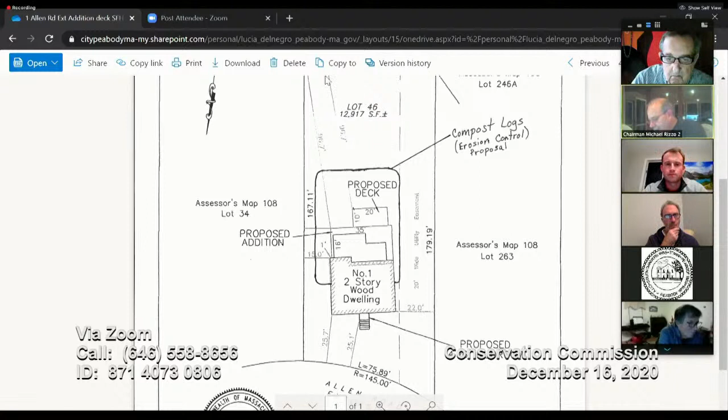Okay. And then as you're excavating, you're going to take out most of the spoil at that time and not stockpile. That's correct. That's correct. You need enough for backfilling. That's correct, yep.

Okay, so Lucia, you want to speak on this? Yep, I'm gonna stop, hold on. It's hard when I have to share the screen. I forgot to record. All right.

So really, my notes just say, because as you already said, it's a super simple project. So whatever kind of erosion controls you guys want, we don't allow hay bales. I already expressed that to them.

Yep, I can send them some links. I don't know if you guys have any links of companies that do a good job with the compost logs or the straw wattles that don't have the mesh on them.

One of my recommended conditions would be, where do you guys want stockpiling? That's something -- are we going to need to stockpile? Well, I think we kind of discussed that a little bit. Would hope that it only be stockpiling enough to do the backfilling.

Are you putting in a full basement? Yeah, there'll be a full basement. Okay, so there's quite a bit coming out. So usually the contractor knows how much to leave so that he can backfill. Right, and if you could do that, then I would think that probably towards the rear would be the spot you'd have that stored. Right.

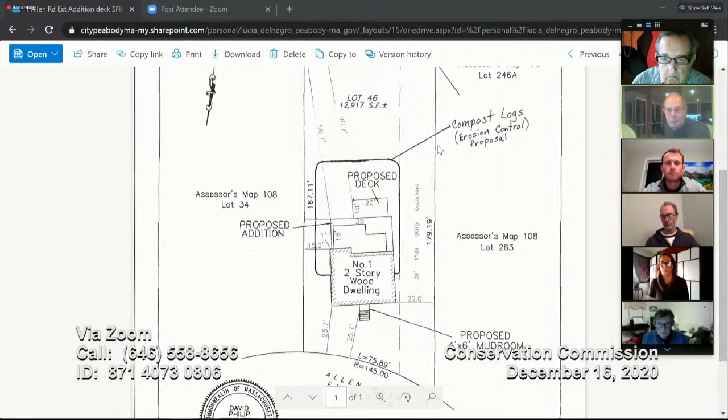Even though, let me find the wetlands. So the wetlands are, this is the wetlands right here. Yeah, remember this area, Bay State Boulevard? Oh yeah.

So I guess my conditions would be, if you guys were going to, after you open it to the public -- I think I do see some members of the public there. There's a lot of people in the meeting room right now.

But it would be, the erosion controls must be inspected and approved by city staff before work can commence. Typically 48 hours before the start date, I would get an email.

If you guys wanted to add a stockpiling condition, I would highly suggest that you do, if they are going to stockpile on the property, that erosion controls are around it and then it's covered with a weighted tarp at night.

And then just the other, I guess my same one is the owner should notify the commission in writing once work is completed. So 3 super easy conditions: erosion controls, stockpiling, and notice.

Okay, great. Those sound fine to me. I think we talked a little bit about the stockpiling already, right? Yep. And how about the rest of your commissioners? You guys have anything else you want to add, or have any comments or questions about this? It's like a pretty straightforward project.

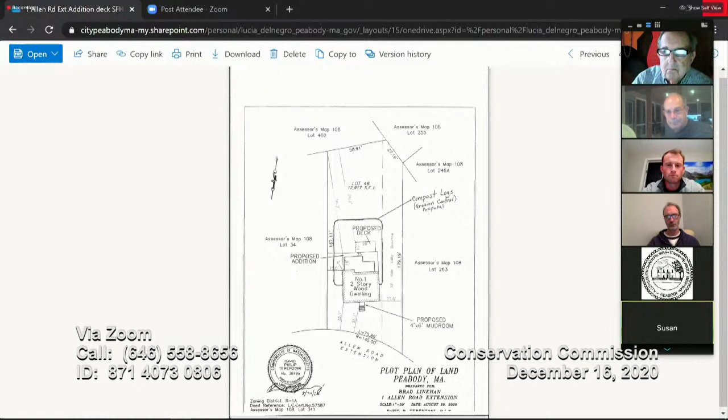Correct. Yep, okay. So what I was saying, thinking if there's an actual building there, maybe the drainage would be different. So where the house is now there's like the wall. It's a little bit different in the front than in the back, right up - I guess I'm not explaining it clearly. So if you put in a basement and everything farther into the back, that would change the drainage.

Just the fact that you're taking all the grass and dirt up. So against that line where the compost logs are, it dips down from there, down to those two fences, and it's probably 8 feet, isn't it, or something like that, that it would drop down? Yeah, I think just looking at the plot plan here, Sue, it looks like it's about 20 feet or so. I mean, grade wise, the difference in elevation, I don't think it's 20.

The difference in elevation from where the BMPs will be placed and where the property line is on the right side of your house - what might be that grade difference? Yeah, I'm not positive either, but I would say it's probably 8 or 10 feet. Yeah, that's probably right.

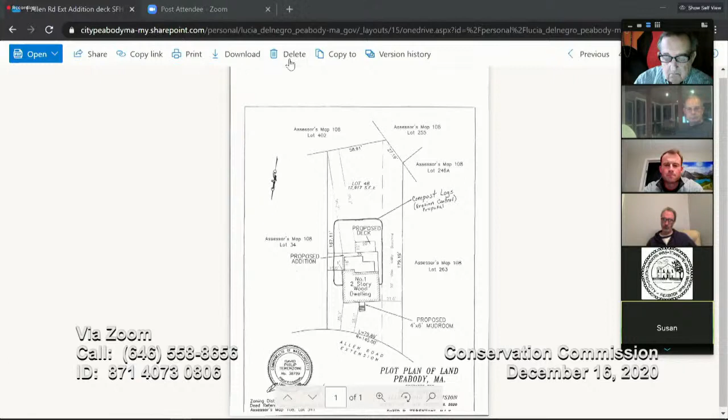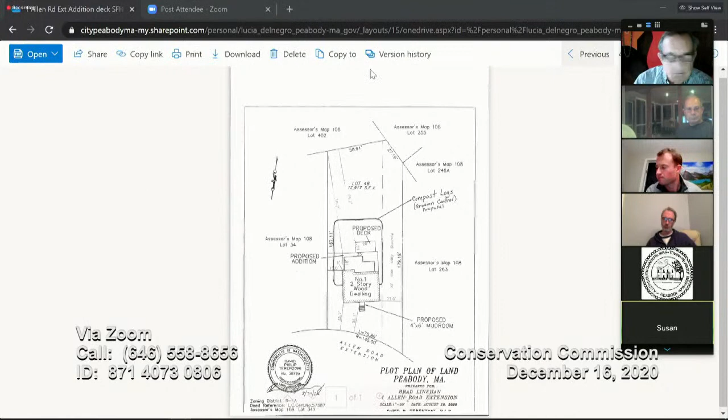Because I think that's probably Susan's issue, and she's right, water will be displaced. Yeah, they're higher than I am, so I'm lower. If I might get more, and actually the back part of my yard, which according to the assessor's map is even lower than the other part.

I hadn't thought of the water running through what I'm calling the dead zone. But it is a bit of a hill. I mean, it might not make any difference. Yeah, it's not like we've really had an issue with flooding in the past, Sue, so I'm not sure this would really cause much of a change.

You haven't, I have. I have a sump pump, so I have had an issue. I don't know if it would make a difference in the back there on the water. Before they built Allen Road Extension, there used to be a little gully between us that would fill up with water and take care of it. But when they moved all the dirt, that's no longer there.

I'm just not looking at it—if all that area is displaced, which now absorbs water, I don't know whether it would make a difference on that hill. You don't want the whole hill running down either, eroding.

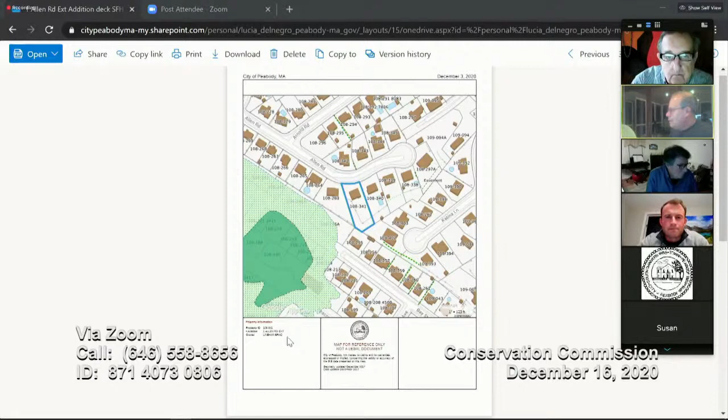If I could ask a question about the addition, there's a couple shapes—it says proposed addition and shows 16 by 35, then there's another shape inside the square. What's the difference between these two? Yeah, Mike, the shape within the square is actually our existing deck. So the addition would be replacing approximately the area of where the existing deck is.

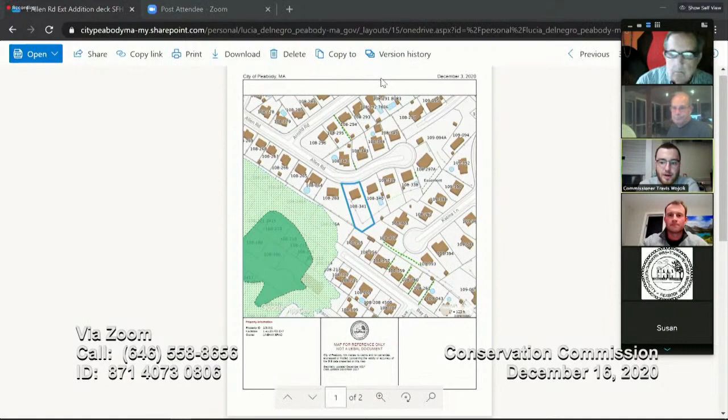Brad, I've got a question through the chair. Is this entire project within the 100-foot buffer? I'm not sure if the entire project is. I think it goes about halfway into where the project would be, something around 60 or 65 feet or so.

So is this property non-jurisdictional or jurisdictional? No, the entire project is in the buffer zone—he's saying it's 60 feet away, so it's the last 40 feet of our 100-foot wetland buffer.

Okay, well, any other commissioners have any comments on this? I don't think this is going to have any effect on anybody, I don't think it will affect the abutters at all. They're not doing anything that's going to affect any of the grades. When he's done, that's it.

I understand there's going to be a roof and some runoff, but it's just going to run off to the adjacent ground—it's all in his yard. Yeah, I think you're right.

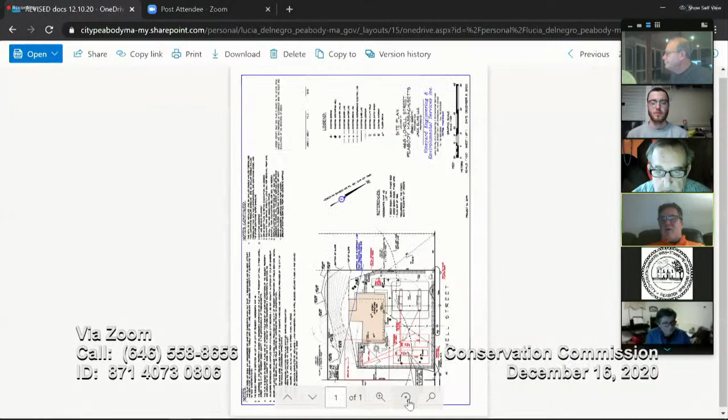We revised our plan - not sure if Lucia can put that up - but we've increased the number of erosion controls. I extended it at the request of the commission, and we showed the location of the proposed fractionation tank. Again, we don't anticipate any groundwater management requirements, but we do have a provision to deal with groundwater, and we will be working in close contact with the LSP of record for the site, which is Sovereign Environmental. You can see on the drawing, the frac tank staging area is to the right of the building as you're looking at it from Lowell Street.

And you can also see on this drawing, there are several monitoring wells around. As part of our letter, we identified the data tables from the Sovereign report, the most recent one submitted to the DEP in January.

We took that table out and included it with our submittal so you could see the depths of the groundwater. Tanks are going to be about 8 feet diameter, 2.5 to 3 feet below grade. They're not going to be pouring any concrete in the ground, so there's no reason to dewater. What they may end up doing is over excavating and then putting the stone bedding, so they could be excavating in the water.

Most likely they won't be dewatering to do that. But what they would do is put stone bedding in, and then put dead men on each side of the tanks, a long way, parallel with the tanks. They would pour the concrete to create those dead men at the ground surface and then lower them in, and strap the tanks down. Generally, if they had to dewater, they'd put it into the fractionation tank, and once the tanks got into the ground, they would use that fractionation tank water in the tanks and just leave them there as ballast until they got them covered with stone.

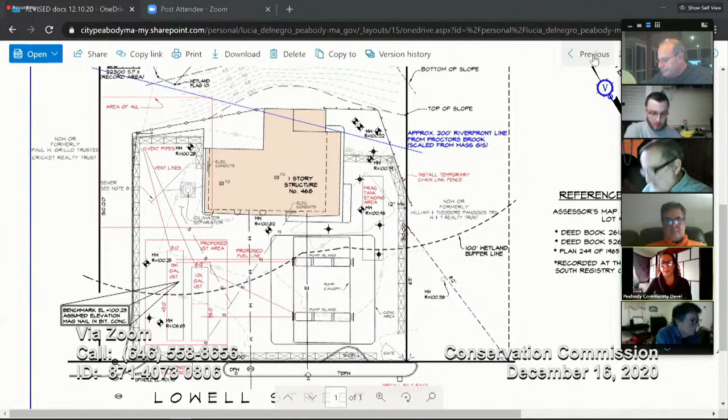Has DPS looked at this project at all? Have they commented in any way, Lucia? I believe Bill Stansfield got a copy of it. It doesn't look like he responded, hold on, because these are just revised. Yep, here's the DPS memo. Yeah, that's the same one from last time. Yeah, he's not gonna respond. You guys brought up more comments than he did.

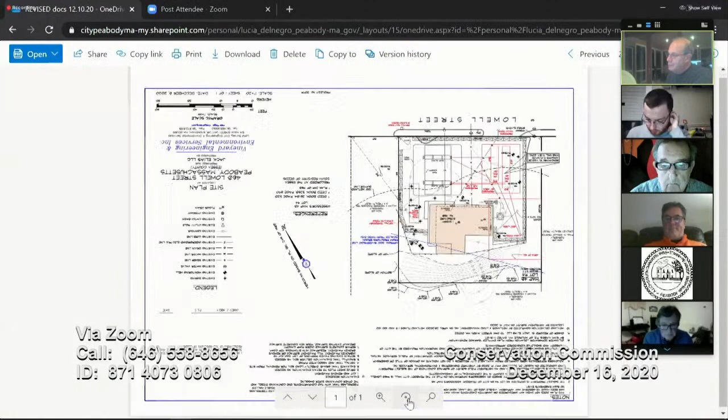All right, well, I think the method of installing the tanks and the excavation associated with holding up the sides - these are deep holes. Like you said, the tanks are 8 feet in diameter, and they're about 30 inches down, so you're looking at 10, 11 feet of excavation, in rather close proximity to the road. So for safety reasons and OSHA standards, you need to cut that slope back at least 2-to-1 or 1-to-1, which is going to take you into this town layout.

Right. So I would assume that you might be putting some sheet piling in or some kind of shoring to hold these holes up. Yeah, that's probably likely. And the sheet piling will also control groundwater. Right. So they're not showing the plans, and it's not on the drawing, and there's no detail for it. I thought I saw something about shoring somewhere. Oh, drive sheet piling, yep. It's a note on your plan. I thought I saw that.

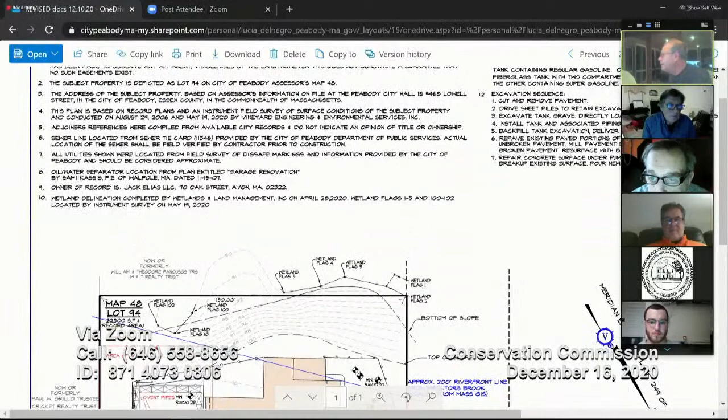We probably, it hasn't been designed yet. It has to be designed by a structural engineer. And if they get approval, we can submit those structural engineering plans or the plans for the sheet piling as a condition. Okay. But this is a standard practice for the tank installation. A lot of times they're close to the property lines. In this case, it's pretty close to the roadway. We're trying to pull it away from the wetland.

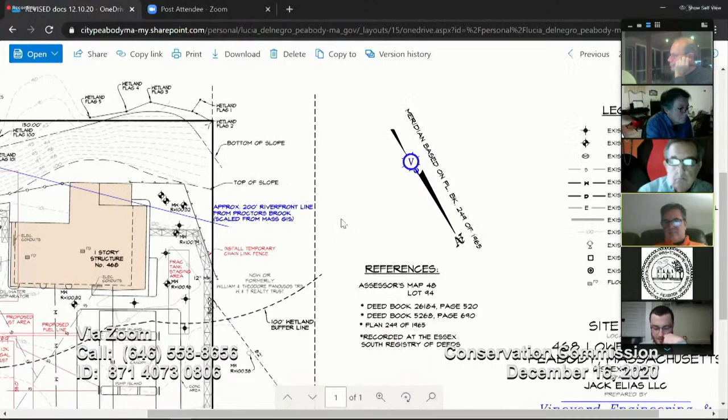Is this going to be self-serve? I think I asked that last time. Eddie's online - Eddie, is this going to be self-serve? Yeah, that's what you guys said.

I'm not quite sure what the answer was the last time. I don't think it's gotten to the point where they've made that determination.

So the canopy and the islands, are they going to stay? You're not doing any island replacement? I believe the existing islands are going to be reused. Initially they were just going to trench over to them, and they're probably going to replace the pumps themselves. I don't know if there's any pumps even actually out there right now. They would normally put in new pumps, new lines, up to today's standards, but the island itself was going to remain. As far as I know, the island is going to remain.

Through the chair, one of the questions I have is, are they going to remain open during this? I don't know how they can, but are they intending to remain open? They won't be able to. I think the answer was last time that they were going to have to close. There's going to be quite a bit of construction equipment in the area. The hay bales are going to be encircling the whole entire site, and the construction fence is going to go outside the hay bales. So it's not likely that they're going to be able to stay open even if they wanted to, since they wouldn't have access to their garage openings. And obviously there's no gas there now.

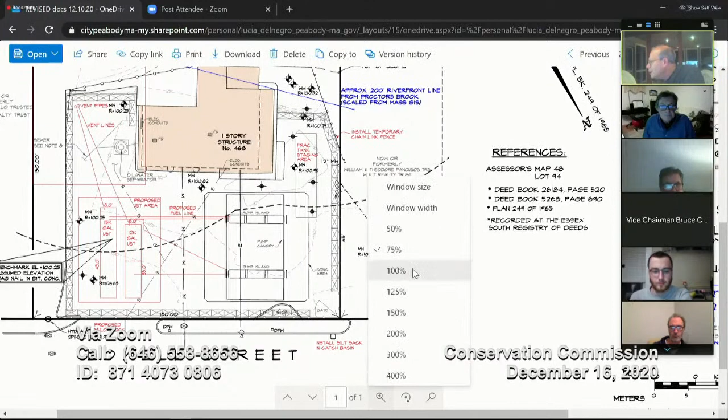Now will the site be fenced off? Yes. Is it on the drawing? Is there showing construction fencing? Maybe it is, I see something. Yeah, you got a fence with a gate? Mhm, okay, I see it. All right.

So the concrete slab would be the same size? It is, exactly the same size as before. So maybe we can get a copy of the fire suppression plan. Has that been filed with the state fire marshal yet? I don't think it's been designed yet because we're hoping to get through the Conservation Commission first. Once we're finished with the Conservation Commission, we have to go to the city for construction. Well, maybe we can get a copy of that when it's prepared, 'cause that'll show all the information about the concrete pad and the dimensions and all that stuff.

And what about the pavement? So we don't know the limits of your milling and overlaying. You can't tell by the plan how much of the existing pavement is gonna be removed and replaced, or where the milling and overlaying limits are. We're not intending to do any more paving than is already out there right now, it's gonna be the exact same. The site is largely paved; the only areas not paved are behind the station and on the edge of the property sloping down toward the wetland. We wouldn't extend the paving any further than it already exists.

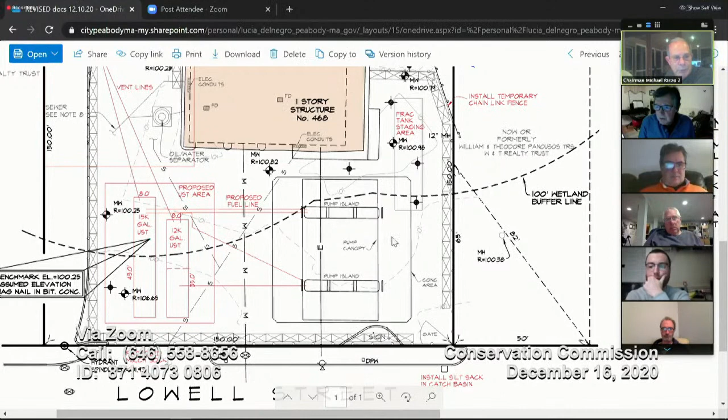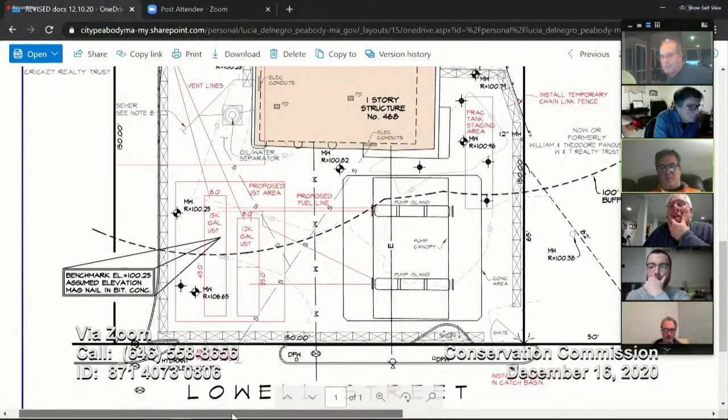We're not opposed to using straw wattles or mulch sock, whichever. I think that was preferable to the commission. You prefer one from the other, Lucia? Straw wattles? The first plan did show hay bales, and I think that's where it was probably looking at an older plan.

My preference is anything that doesn't have plastic meshing. It has to be either biodegradable from the sun, or the compost logs that you just cut open and leave there. Well, no, Lucia, they're all gonna be coming out. That whole site's paved, so once construction's done, those will just be taken up. They can't be left there to go back into the soil. There is no soil, it's all paved.

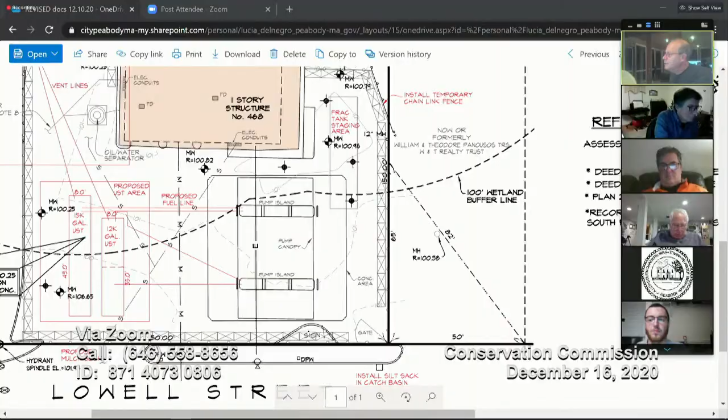I know, but even if they use the plastic ones on site, the plastic's gonna go in a landfill somewhere. Oh, so I'm just thinking of post-construction. Okay. So that could be a condition. Anybody else?

If nobody has any other questions, Lucia, if you want to open it up to the general public who want to speak either for or against the project. Yes, if anyone in the audience would like to speak, please raise your hand. So far, I can tell you, I don't think anyone in the audience is gonna want to speak. It looks like everyone in the audience is for, as I said, 83 Pine or 0 Willowdale.

Okay, if you wanted me to read off my recommended conditions again, I can do that whenever you want. Or if you guys already have conditions you're thinking of, I don't even need to. I think we kind of talked about it last time, and now we got an updated plan. I would like to see some of the proposed work relative to the pavement and the concrete pad shown on the drawing, so we could condition that the plan be updated to reflect that.

I do, actually, sorry to interrupt, Councilor Charest has his hand up and he would like to speak. Okay, sure, can you hear me? Yes, yes. Again, this is not my ward. Thank you for allowing me to speak. This is not my ward, but my ward is across the street.

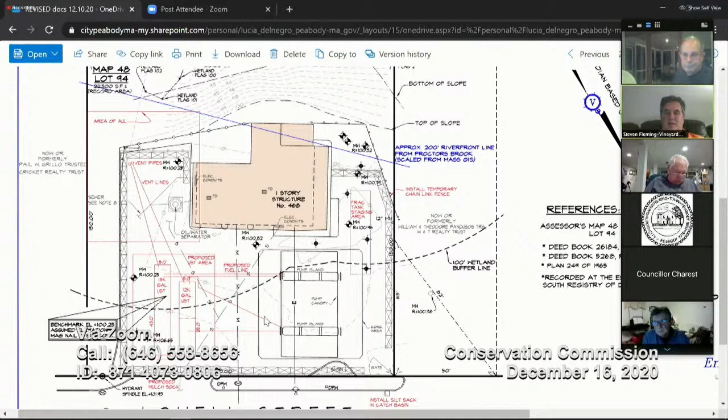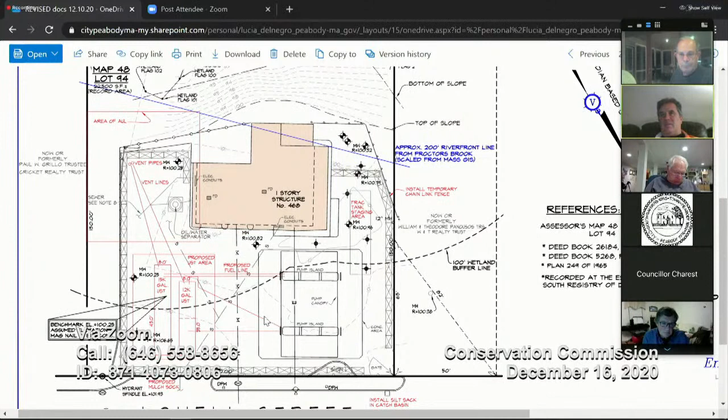Sure. We prepared a soil management plan. The site is currently an existing open hazardous waste, state-listed hazardous waste site. Removing any impacted soils from the site only improves site conditions and reduces overall contaminant mass. We expect that the upper soils will be non-impacted because the area had been excavated before, but we expect that the lower soils, in the low portion of the excavation closer to the water table, may be impacted by gasoline constituents from historical conditions. Removal of any kind of contaminant mass can only improve overall site conditions.

The material will likely be removed, recycled, and turned into asphalt batch material and reused as pavement. It's a great solution for a problem. The area will be replaced with clean backfill, and then the tanks will be installed so that the service station can operate at its highest capacity.

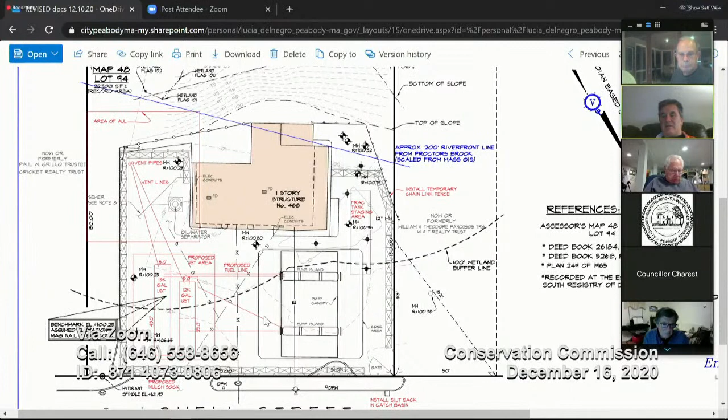The tanks that are going to be installed have all kinds of protections and a lot of leak detection systems that are pretty sophisticated. The system shuts off every evening, and if there's even a change of pressure, the system can't go back on again. So if there is a loss, even between the two double walls of the tank, say the interstitial space detects that there's a loss of pressure, the tank system shuts down. So it's a really sophisticated system going in there, and removal of the contaminant mass should only improve site conditions.

It will have no impact at all on the resource area of the wetlands. Removing that soil can only improve site conditions and reduce contaminant mass. Thank you. Thank you, chair. So you're saying the movement of the soil and pavement, there will be no release into, there's no escape from the removal? There's no chance of that escaping the removal and going into the wetlands?

I'm not quite sure how that would happen.

We're going to take the soils and pre-characterize them ahead of time in accordance with our soil management plan. That means we'll take soil samples using a small drill rig, about the size of a small Bobcat loader, collecting samples from the upper and lower soils and running them for laboratory analysis.

Before we even open the ground, we'll have a location where those soils are loaded from the ground to a truck and driven off site to an appropriate disposal location, whether it be asphalt batch recycling, or for the upper soils, an unlined state-listed landfill for soils from sites like this that aren't impacted above reportable concentrations.

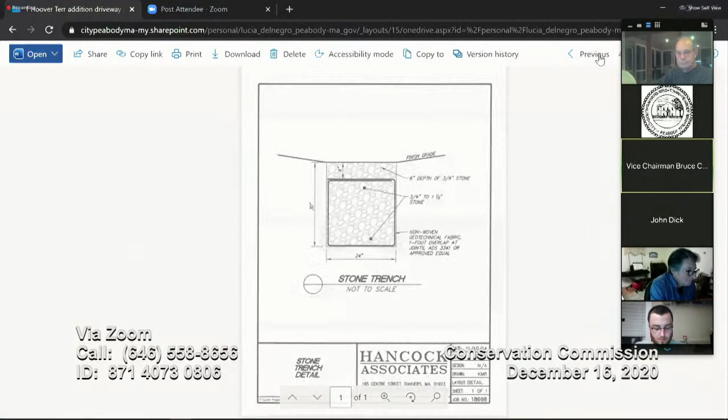Bear with me, I'm trying to find it, I was given so many plans for this. I don't know where this is. You gotta open the file. You gotta open that. Yeah, go to that. That's not the most up-to-date plan though, this isn't even it. Right, you gotta hit open, up here in the left-hand corner, because it keeps going away. You gotta scroll down. Oh, here we go, there you go.

John, it's pulled up. There we go, how's that? Can you hear me? Yeah.

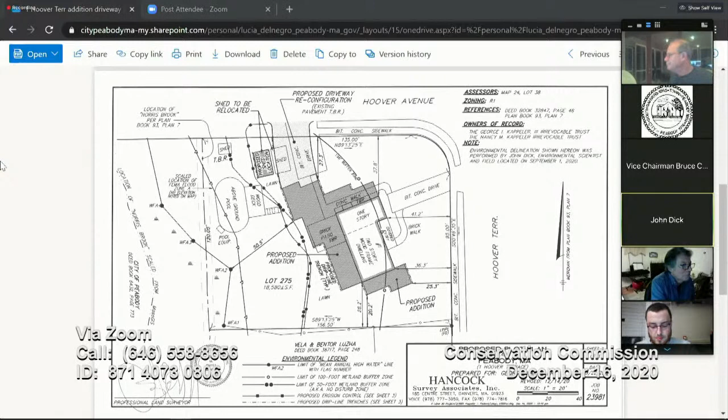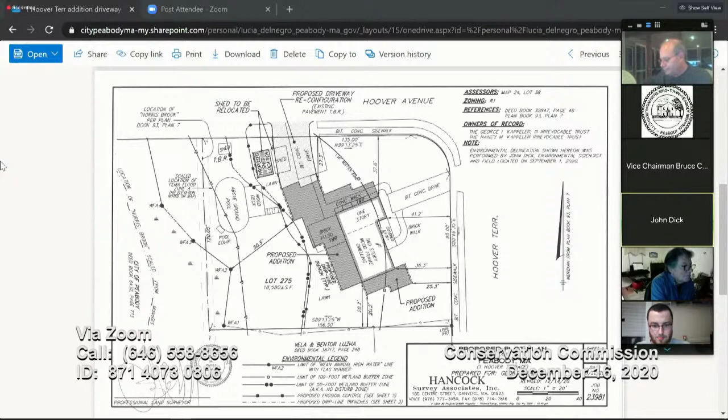This entire site is lawn right up to the edge of the stream, and that's not going to change. But on the other hand, what we propose to do is compensate for all of this additional hardscape by recharging all of the roof drains and the driveway. You can see here on the plan dashed lines and a proposed drip line trench, and on the last page of the plans are details for those trenches.

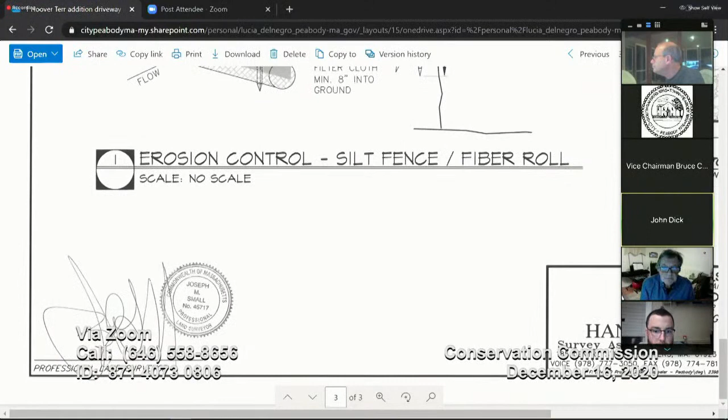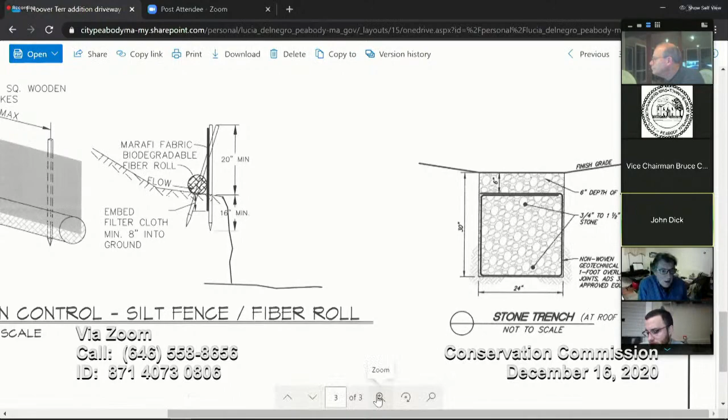I would hasten to point out that we don't yet have a roof layout for the property. We're guessing where these trenches are going to go. Rest assured, the trenches will go underneath the eaves, wherever the eaves wind up being. But it makes no sense to get ahead with the design of the individual floors and rooms in the house until we get a permit to actually build the footprint. So the stone trenches will be underneath the drip lines, wherever they wind up being, and we'd be happy to come back with a revised plan when we have the architectural drawings.

So why would we issue a permit now if you don't have that information yet? The architectural drawings are neither here nor there. The floor layout, all of that, under the wetlands regulations, is not a concern of the Conservation Commission. It's the footprint of the impervious surface that matters. What we don't know now is which way the roofs are going to pitch. It's very likely that they'll pitch exactly where we show them.

You'll note we also put a recharge trench alongside the new driveway, and a recharge trench alongside the shed. So this is actually a net gain for the riverfront. Areas that previously discharged to surface from conventional gutters will now be discharged to a recharge drain built underneath the eaves. This is essentially stormwater management for single family houses.

That's a big house. It is, and as I say, this is largely because they're trying to convert to a one-story house so that they can readily move around without climbing stairs.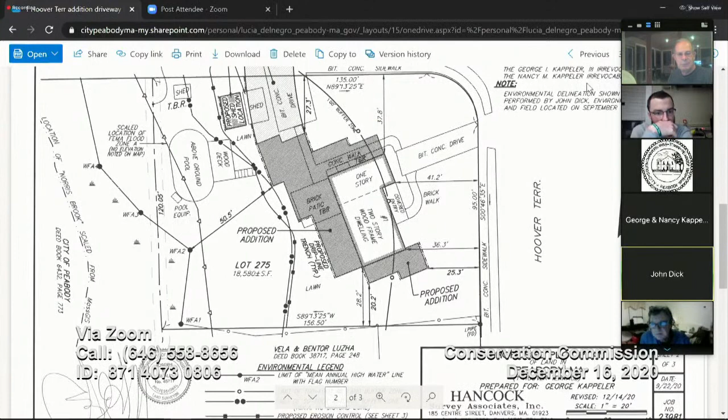What's the status of the pool there? There is an above-ground pool there, yes. So looking at the configuration of your new building, it looks pretty close to the pool. Is that going to stay where it is? George, I'll let you speak to that. As far as I know, it's not moving.

Anybody answering that question? Is George there? I'm sorry, I muted instead of unmuted. Yeah, the pool will stay there. Maybe the configuration of the stairway to the deck will have to move.

I think the site is fairly flat. The site is quite flat, yes. So you're not proposing any grade changes? None.

Is there a silt sock shown on here? The silt sock is shown. It interweaves with a 50-foot buffer because we have to get behind the building to work on the siding, so there's a section in the middle of the property where the silt fence is a little closer than 50 feet to the wetland. That's just to give us room to swing a cat back there. Oh, there is, yeah.

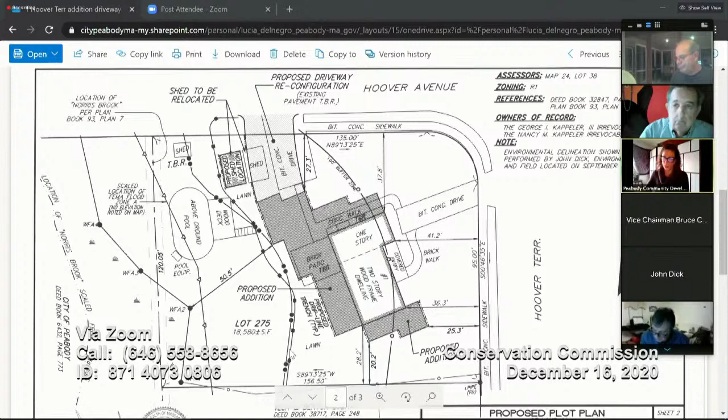And then the last one would be the roof runoff, via surface recharge trenches along the drip line in lieu of discharge via downspouts, as stated and shown on the revised plan and narrative, should remain in perpetuity. So those erosion control, stockpiling, the pool condition, and the roof trenches in perpetuity.

Okay, sounds good. I have a question about the drip edge trenches — if they're in perpetuity, don't they have to be cleaned out periodically? Because they'll fill up with all kinds of debris.

You're exactly right. Usual practice is that every 10 years you take a look at them and see whether they're blocking up or not. It's pretty obvious when they do — you start getting ponding water. Then you just dig the stone out and replace it. And the current homeowner has to do that. Well, the current owner, or whoever owns it when it happens.

Okay, will that be written into something so it's identified? Well, the order's on record forever, and it'll be recorded. And when they come for their certificate of compliance — they're going to need at least a partial certificate before they can get their occupancy permit — when they come and get the certificate of compliance, there's a section we check off that would say conditions in perpetuity. The pool condition would be one, as well as those trenches.

Bingo, thank you. Is there any approved permit for the pool? Does the building inspector have one? I can't answer that question. No idea. This is George Kappeler — no, that pool was there when we moved in. I mean, it's been replaced, but no, there has not been a permit.

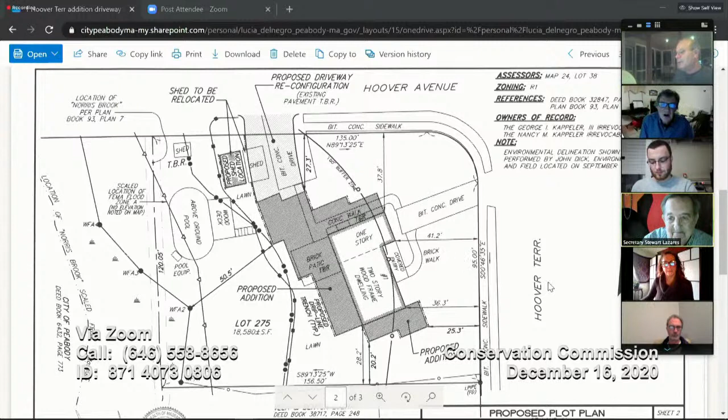All right, and I'm gonna go ahead and do a roll call. A question on the stockpile - the stockpile we determined to be in the front yard, right? Probably on the side, looking at the site plan, I would think that they're in front of the house. Well, there's trees there. I don't know where - wait a minute, go around the corner here. Yeah, it could be the front. Could be the front. Hopefully they'll take out any material that doesn't go back in.

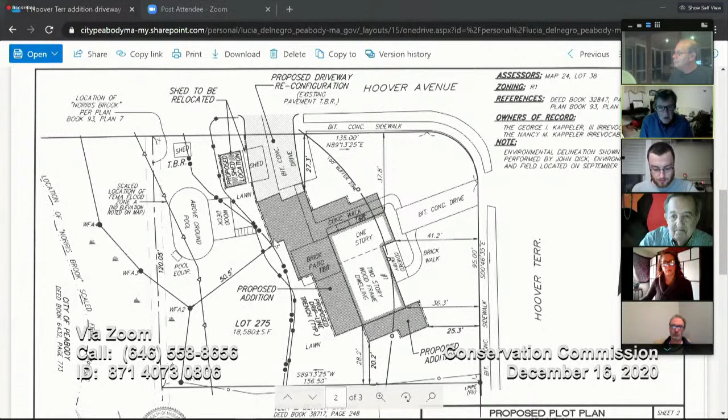So no stockpiling in like the 50-foot riverfront as demarcated on the plan? Yeah, that's a good point, that'll do it. You can put it on the corner. They can put it on the corner where the reconstructed driveway is, that area right in there towards the corner of the lot. That's a good spot for it.

So you didn't take a roll call yet, Lucia? Nope. Chairman Rizzo, yes. Vice Chairman Comack. Secretary Lazares, yes. Commissioner Athos, yes. Commissioner Vivaldi, yes. Commissioner Wojcik, yes. All right, passes 5 commissioners. Thank you very much. Hey, good luck. Good night.

Okay, item 4 on the agenda is a request for a certificate of compliance. It's a continued request for a full certificate of compliance as made by Curtis Young, environmental consultant, wetland scientist, on behalf of Group 1 Automotive, DEP file number 55-832. The project is entitled Proposed Inventory Lot. The address is known as 0 Willowdale Ave, map 39, lot 29 and 23, in the city of Peabody.

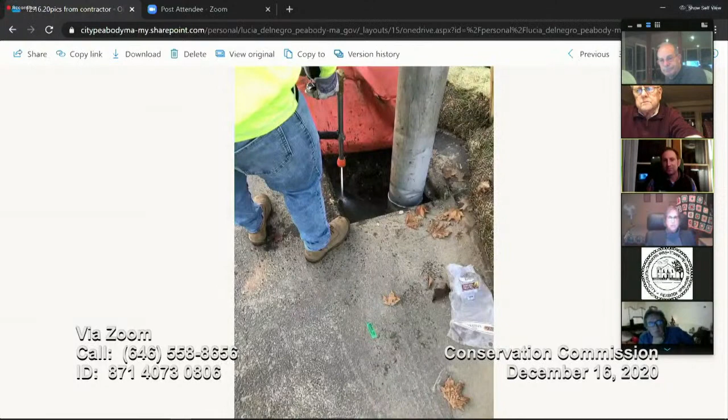When we first started the project, we knew the catch basins were in bad shape, so we were in the process of cleaning them out. If you go to the first photo, Lucia—this is the one catch basin our site drains into, this is after she was out there. We put the protection on the catch basin. The next photo shows general debris in there, right before we started to vac-truck it out. The next photo shows the process of jetting and sucking out that area. Then go to the next photo.

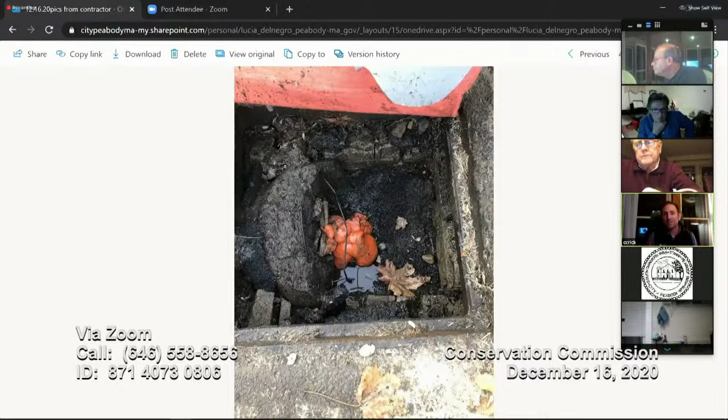Basically not very far down into that catch basin, someone previously had put a patch of pavement down in there. This outlet pipe to the left, someone jammed a bunch of concrete in and then spray foamed it shut for some reason.

It's pretty clear that there's no way for material from our site to have gotten out to that headwall from here. We don't know why this pipe was plugged up, but we do know there were a couple of changes made to the parking lot here. That's why if you look at our site plan, you'll see a bunch of former catch basins were converted to manholes and catch basins added.

This particular basin was, I think, typical of the basins constructed on site. It's not really a sump, just a block structure with an outlet pipe, probably a 12-inch reinforced concrete pipe. You can see a piece of the reinforcing where it's cracked there.

We don't know why anybody would have blocked it up, but the pipe in the catch basin was reported as clogged in our initial survey, and it was blocked by somebody, which is why as silt got into the basin, it just remained there and never went down the pipe. There is silt in the pipe, but that's from a long time of neglect under prior ownership, and maybe to some extent the current ownership.

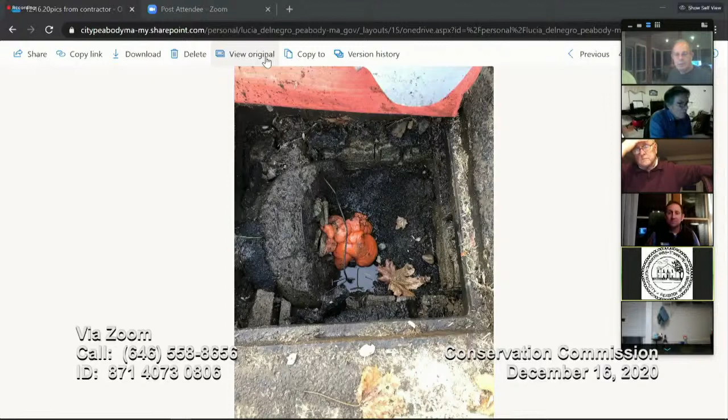Yeah, because I just don't know what to do about this. It looks like — Peter's saying we have a rather simple solution, and it looks like there's a whole list, a shopping list here, a lot of things that need to be done that I don't know who's responsible to do.

Well, we're responsible to make that one basin offline.

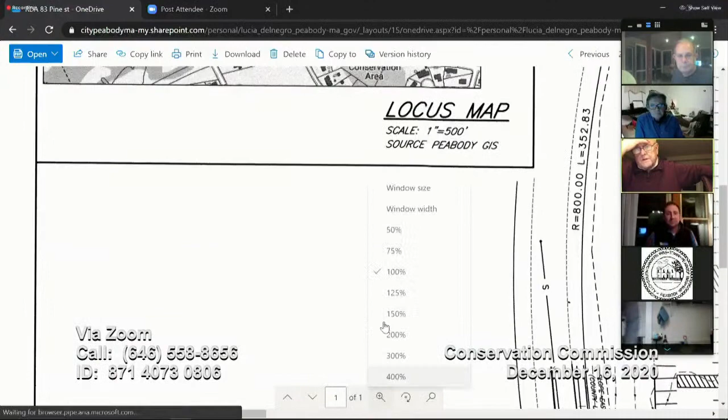This is all we received, just one sheet. Well, that's correct, because we applied for a request for determination as to the jurisdiction, to know whether or not we were going to be within the requirements of the Conservation Commission. So we flagged the wetland, indicated the buffer zone, and got a determination that our activity would be outside the jurisdiction.

But there was a site plan submitted to Public Services, which was reviewed, and the list Chairman Rizzo is referring to was a list of requirements we worked out with him. He gave us an initial list, and we came back and said we don't think you can ask us to change all the catch basins on the whole site. There are a lot of catch basins on this site, some of which are actually on town property, that large arc you see on the plan. Everything down toward the bottom of the plan from the arc is owned by the city of Peabody, marked as such, and above the arc is owned by the condominium.

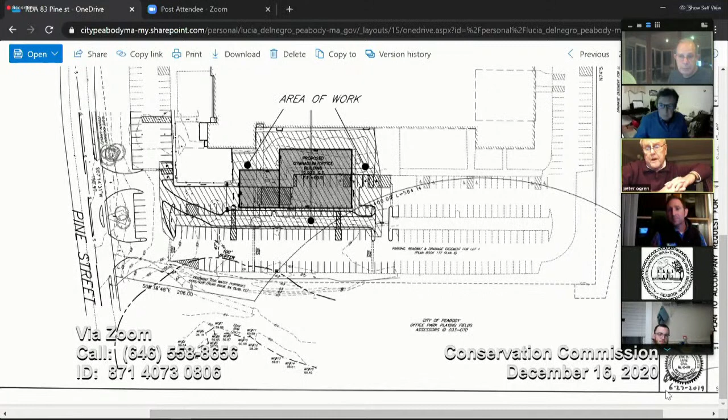So what's the status of all that now? The 24-inch trunk drain has been cleaned all the way down except the last reach of pipe, and we were asking to dig a small sump at the mouth of the pipe in order to rinse that silt down and clean it out at the mouth. That's kind of the way you've got to do it - it's difficult to get it to run uphill, as I'm sure you're aware.

What we did was clean it manhole to manhole - we went down to the manhole and sucked it out. Now we're down to that last reach of pipe. Chad, how long is that last reach? It's probably about 100 feet.

What we want to do is clean that downstream from the manhole to the mouth of the pipe and pull the silt out at the mouth. We didn't want to do that without permission, so we initially asked Will Paulitz about it. He got in touch with Lucia, and Lucia said the commission would have to give us permission to do that. That's when Lucia came to the site and thought we had caused all the siltation and were in violation.

That's the print I was looking for - that's what it looked like when we first got there. I think the reason there's a little channel washed out now is because the pipe has started to flow. When the pipe was in this condition, it barely flowed at all.

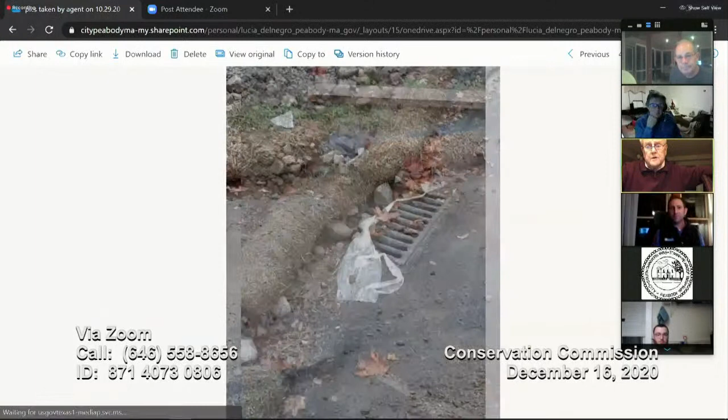There's also another pipe that comes from your athletic fields that belongs to the city, over on the right-hand side of this picture. Going back to that other picture - there's another pipe that comes in where those rocks are, and I don't know why the rocks are there.

I can't explain it, I don't know, but that pipe is not free flowing either. That comes from the athletic fields that belong to the city.

Only lately have I seen water coming out from that other pipe, the one you can't see, that comes from the athletic field. You can see water seeping out through those rocks. But that's the condition the pipe was in when we arrived here.

It was, I would say, probably two-thirds full. It's, I believe, a 24-inch pipe if I remember correctly, and it was about two-thirds full of silt the day we arrived at the site.

These pictures were taken by me in October. Right, we hadn't done any work at that time then. In fact, that was the day this picture was taken.

These pictures were taken by me in October before you did any cleaning. Oh no, we had already started cleaning at that point. Right, but there was no cleaning done at the discharge end of the pipe.

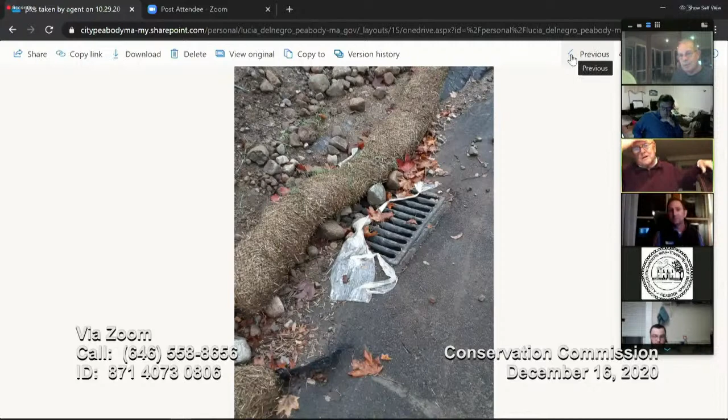Correct, we didn't clean it because we didn't dare go in and take the silt out at the mouth of the pipe without asking permission, although I believe you can do that under the maintenance requirements. We talked to Will about it, and Will said he wanted to talk to Lucia about it, and she said we'd have to get permission from the commission to do it.

But what we want to do is not clean the whole channel downstream. We just want to clean a little sump at the mouth of the pipe where the rocks are, so we can wash that silt downstream and pull it out of the stream, probably with a vac truck. Can you get the vac truck in there, Chad?

No, we wouldn't be able to get the vac truck in there, unfortunately. So you'd have to get in there with a small mini excavator, take the silt out, and load it directly into a truck or load it into something else and then put it in a truck.

How far is the head wall from the parking lot? About 30 feet or so.

Yeah, it's probably only 30 feet from the parking lot, but you can't access it directly from the parking lot because of that big fallen tree on top of the head wall, and there's kind of a rugged landscape there. What you have to do is go around into the park and come in from the right-hand side as you look at this photograph.

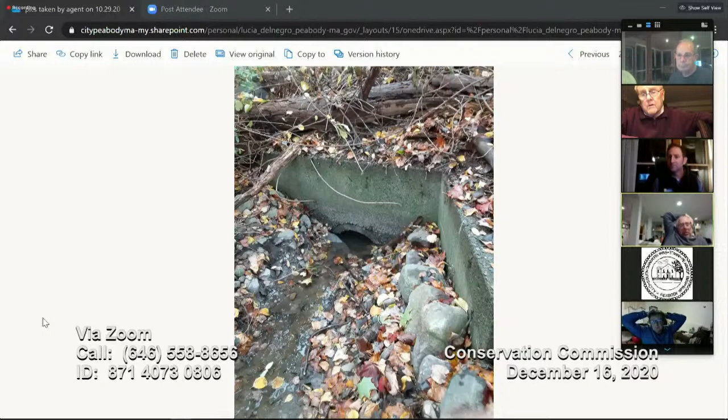I mean, well, we can talk to the contractor. Well over 30 feet, well over 30 feet - 50 feet, 100 feet. I don't think I've done one more than 100 feet, but I don't vac them myself, I subcontract it when I do the work. I just don't see any reason you can't vac it, that's all.

Well, again, maybe we'll have to find a contractor, Chad, that can do it. Yeah, I don't know who we've used for a vac truck or whatever.

If you go back to the site plan that we filed with you, Lucia, you can see where the head wall is relative to the edge of the parking lot. Do you not have the ability to share screen?

I don't have that ability here. That's why I asked, and Chad said you had said you would help him with it. Yeah, unfortunately I don't have it—our actual construction drawings do not have the blown up entire site.

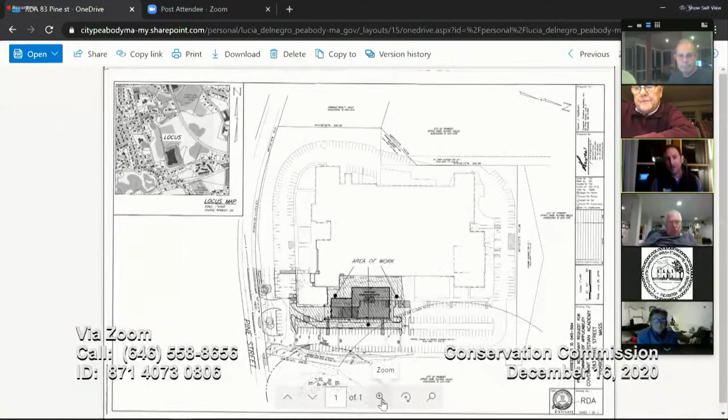So ours don't, and that's what I have here. If you look down in the lower right-hand corner, you can see there's the head wall right there, shown right there. And that's the edge of the pavement, and the scale you're looking at is a 40 scale.

I don't know, maybe 30 feet, maybe it's 60 feet. The edge of the pavement is that rounding that you see right there, and the head wall is shown there, and it's covered with trees. You're not going to back a truck in there. Well, you can't back a truck in there, but you might be able to put the vacuum pipe. I don't know.

Again, I don't know how far. Mr. Connolly is saying that you can go 50 feet or more with that—could be more than 50 feet from the edge of the pavement, but if those parking spaces are 20 or 18 feet long...

1, 2. Yeah, there's kind of a hill right by the side there. You can back the truck up a little bit, but there's a hill right by the curb there. And I don't know, Chad, could you drive the truck around to the way we walk in on the field? I wouldn't recommend it. No. Could you use something like swamp mats?

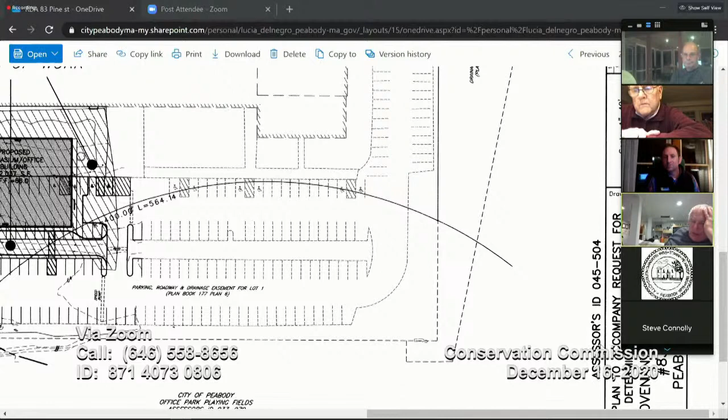You're not going to be able to do it in these conditions anyway, because when it gets this cold and the vac truck starts to work, as the material goes through the pipe, because it's so super cold, it'll just freeze in the pipe. So that's not—you can't do it now anyway.

But all I'm trying to suggest is that it might be advantageous to limit any damage in the wetland, to just run a pipe down there, and at the right time of year when nothing's going to freeze, you should be able to vac all the silt out of there. Again, I'm not trying to give anybody a hard time—we've done it many times, a lot further than this.

Again, I don't see how—I can't really tell. I mean, I see the scale, it looks like it's more than 30 feet. But again, you can go up to, I think we've done them up to 100 feet. So I just think it would be a lot easier and less damage to the wetland.

That's all. And when would that happen, in the spring? Well, again, if you had a warm day in the winter, you could do it. But again, it has to—we've tried it, we've had our own problems doing them when it's getting cold.

Temperature's going to be in the 40s next week. So maybe we could get it next week. As long as you don't have freezing temperatures, as long as it's not too cold, because when that air gets—it's just like a wind chill. I don't know, I just know it freezes inside the pipe. It causes all kinds of problems, and the operator's not going to want to do it.

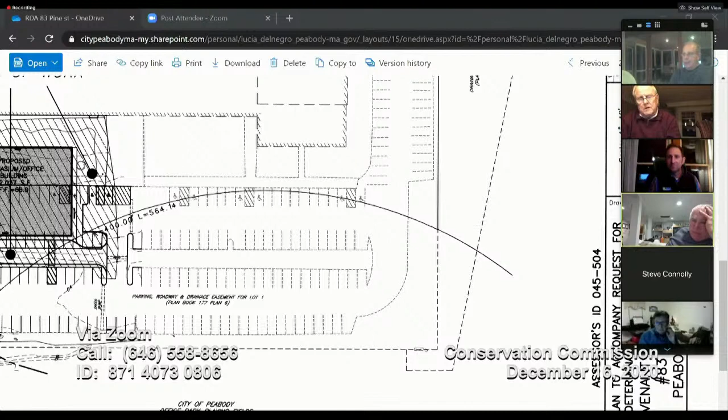Okay. Okay, Lucia, should we move on with this? Are you gonna talk to Will?

Well, are you guys feeling like you want to give them permission to do this work? I have a feeling they might need to do it sooner than later. Yeah, I think it should be done.

I don't know if you guys saw in November, Libby Wallace, the wetland scientist, did submit her mitigation plan. I can bring that up if you want, so you guys can read it and I don't have to read it out loud, because she does talk about probably not being able to get a truck down there. Again, I don't know enough about it, but it sounds like you guys may have... where did I put this? Sorry, here it is.

So I don't know if you guys want to go by what she wrote, or if you want to try for the Vactor truck, or the vacuum truck out there. But are you going to do this under maintenance, or are you going to put some condition on this and issue an emergency cert? That's something that's ultimately up to you guys.